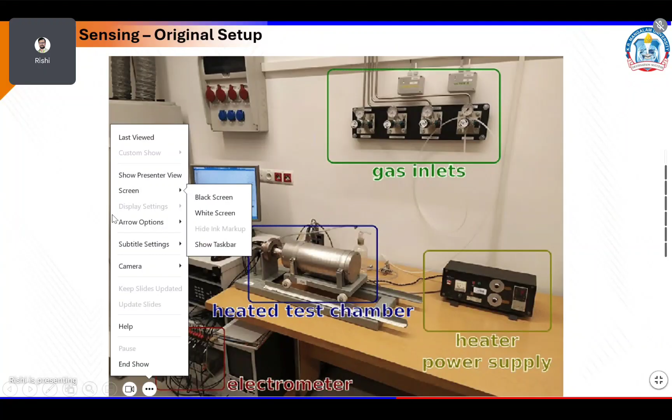Okay, so you can see this is the gas inlet system where the gas will go inside the chamber. This is a computer, and this is a gas sensing chamber where you will put your sample and the gases inside. And this is a heater power supply, and this is a gas cylinder, and this is the source measurement unit, and this is your complete room. So this is one of the images.

But now for the research community or other people, sometimes you don't want to disclose your original image. So what you will do is prepare a schematic.

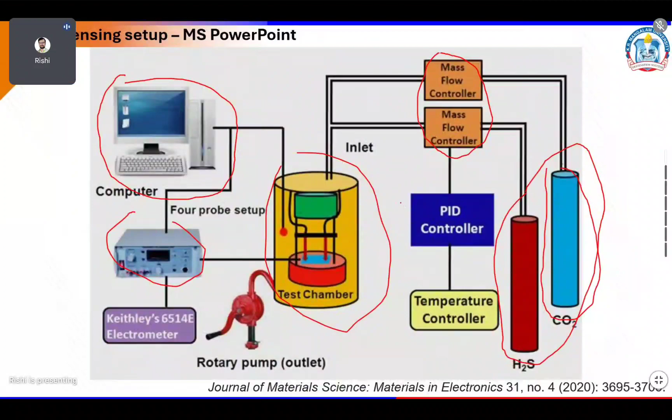Now, why do we need Blender? Because this is a very simple image, for this you don't need Blender. I also believe this image won't look that much beautiful, and it's very simple to draw in any software. Now comes Blender.

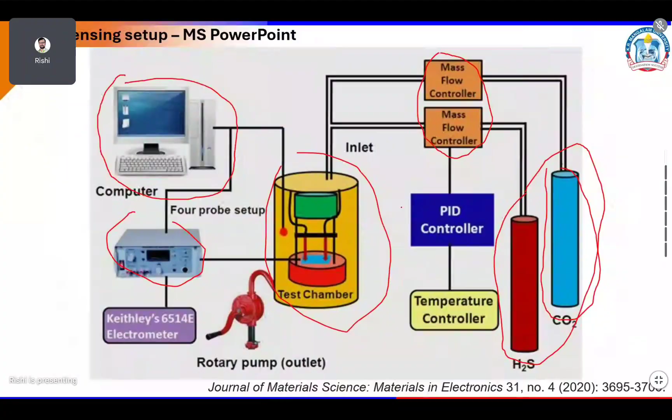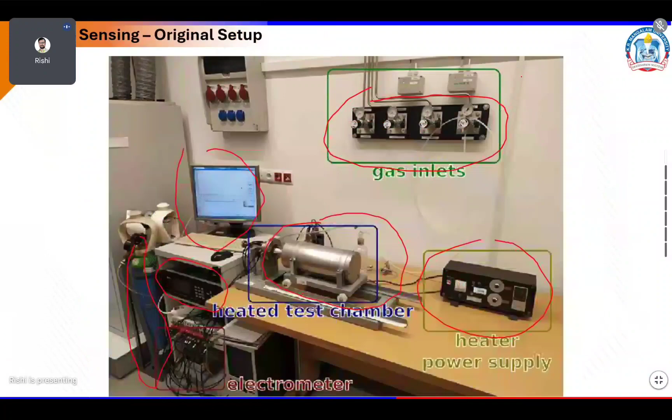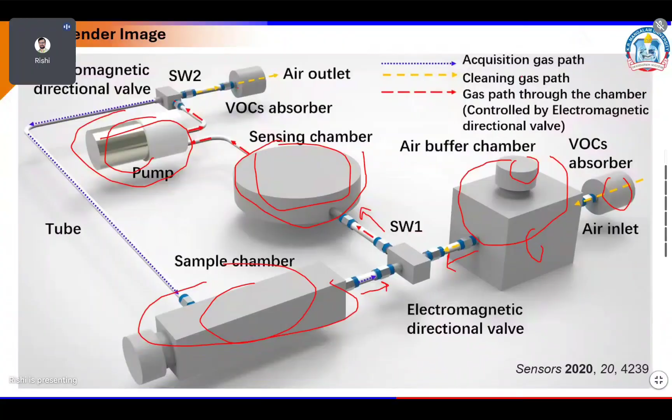It all depends upon your creativity and lots of time. You have to put actually lots of time into creating one image. This image you can see takes just maybe 5 to 10 minutes. This another half an hour. This will take roughly, once you get the experience, maybe 5 hours or less. But this image will take roughly maybe 3 or 4 days, once you get all the experience.

Now, with Blender software, you can draw figures, create cover art, and also create graphical abstracts. Figures, I think everyone knows what they are. Cover art is maybe, whenever you go to the journal page, for every volume they are releasing cover art. I will show you some examples of cover art also.

And then the graphical abstract—this is the first thing which all the reviewers and all the authors will see. So these all three things can be done from the Blender software.

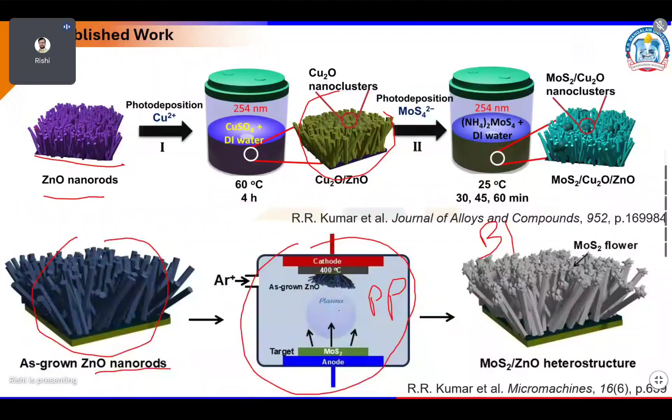Okay, so this is one of the two figures which I have used in my papers, and this is a figure in another paper. You can see this is a process which I used in the Blender software in my research. For Blender, I made this, I made this, I made this. I just changed the color of the top because there are certain processes happening, and then I have taken this sample inside this one. These things are happening inside the beaker, and after that these are the final structure, again drawn in Blender.

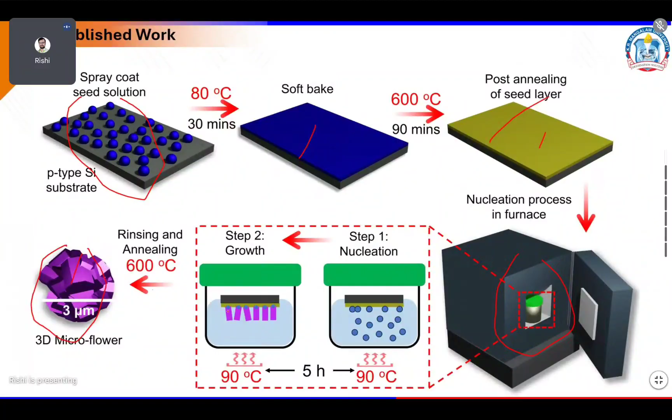But now these two images, you can see, are made in PowerPoint. It's just the front view, so it doesn't look like a very good image, but just to save my time and effort, I used PowerPoint to show the process which is happening while we are heating our sample inside the furnace.

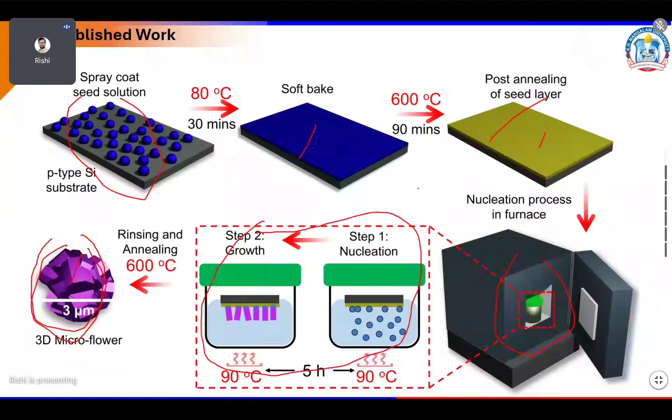So these are the process steps for creating the 3D microflower, the indium oxide 3D microflower. So this way also you can create 3D designs.

And now these are some of the other objects which I recently made in Blender software. This is another rod with some nanoparticles, and this is a thing which is present inside a gas sensor. These are like flowers on top of a substrate, this is a furnace, this is a watch, because I'm working on a wearable device, and this is a sphere with nanoparticles on top, and these are some molecules.

And this is another one, when you combine all the spheres and molecules. This is a chamber, a gas sensing chamber, and this is another device. Now in the center you can see one object is rotating.

So this flower is also made in Blender software. And the good thing about Blender, as I mentioned earlier in my presentation, is that you can export your 3D object to anything, like you can import this 3D object into PowerPoint also.

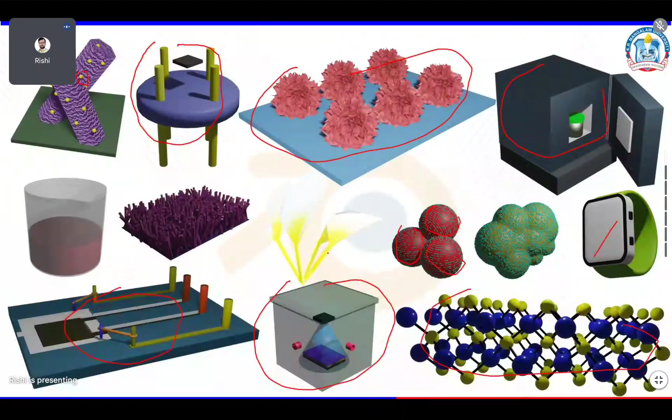I think in PowerPoint everyone knows that. So this is go to insert, then you have 3D models here. Just you need to click on 3D models, and these are some of the 3D models which are available online, free to use.

Okay, let's take one of the objects. So now, okay, flower. These can also be drawn in Blender, but I just want to show you this particular feature.

So you can see this is a 3D object, but it looks like a 2D object. Now if we rotate this object, you can see all the dimensions of this particular object. You can see the back side, the top side, the bottom side, the left, right - all the views you can see for the 3D object.

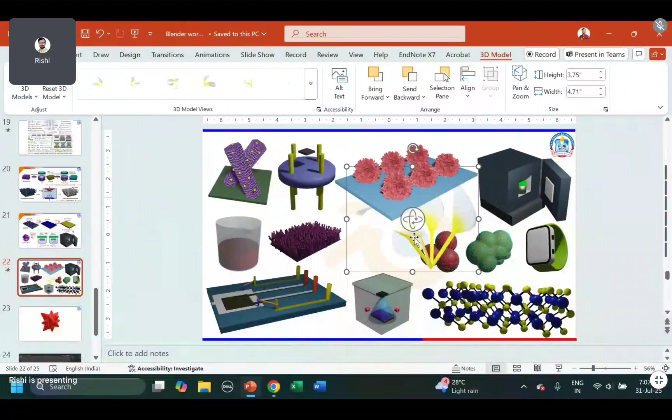Similarly for this case also, this flower. Since I imported this flower in 3D form, it can be rotated, it can be placed, it can be used as it is, whatever you made in Blender. But all these other figures are not imported in 3D, these are all 2D imports because I just wanted to make a figure. So this thing and this thing have different formats.

This is saved in just the JPG format, and you all know JPG format can only be downloaded in 2D form, not 3D form. You can see the 3D form, but it cannot be rotated. If I want to make this particular rotation, I have to export in 3D format, not image format. So this is the difference between exporting your file in 3D format versus just an image.

And for the animation, you don't need to do anything, just swing, that's it. So this is how I made this image to swing in my particular presentation.

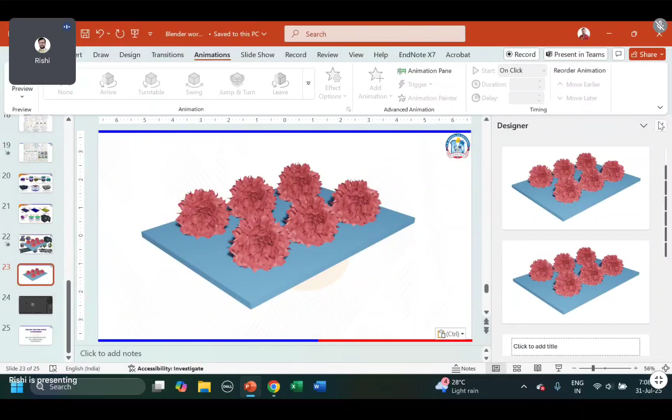Now, because these things will take a lot of time, today I'm only going to teach you how to make this particular image, since it's a very basic thing. I'm going to introduce the software also, and how to make this particular image.

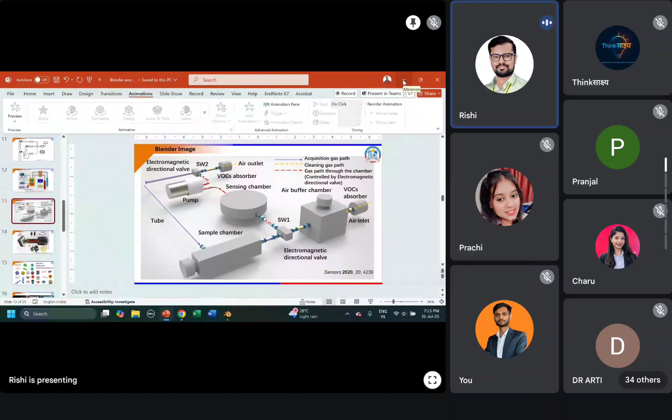So in my presentation you can see why we need the light. Let me show you why we need the light. So in this image I think you can see there is some shadow in almost all the objects. So from where the shadow comes? Whenever light falls on a certain object at some particular angle, it will form a shadow.

So very basic understanding, we require a light. If you don't put the light then the image will appear dark. Not that much dark, but still we require a light.

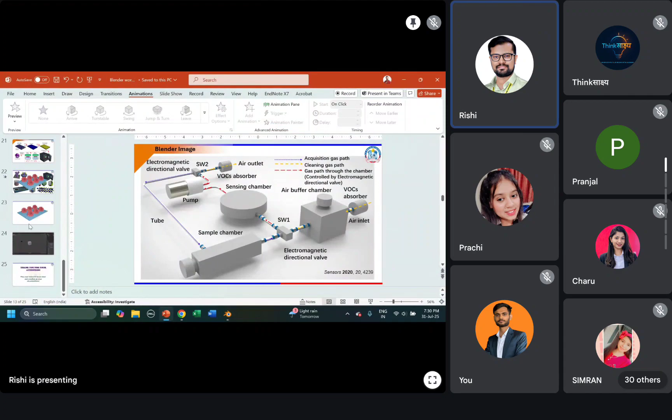So we did all the basic things - you can locate, grab the object and take it to any position, you can rotate the object in almost any direction, and you can scale the object in any direction. From my PowerPoint you can see now the base thing is very easy to make. I think by this you get to know how to make this.

You don't need to do anything, just scale the object, like this. Very thin, and make the rotation 0. Now this is your 0, and now go back to this, this is your first thing - this is what you are going to look like from the top. But we don't want to make our image like this, so we want a rectangle.

For this, what you have to do is scale in the Y direction, S Y - now it will be your substrate. Now left click and confirm the new position. Now you can see it is very thick, so what you have to do is just scale in the Z dimension, S Z. Now you can see we are able to make a rectangle - a cuboid, which looks like a substrate.

So this is a very basic thing which we did. Now this camera means - just imagine you have a DSLR or mobile camera. What you do is just place your DSLR in front of an object, and whatever image is there in front of the camera lens, that particular image will be captured, that particular area will be captured.

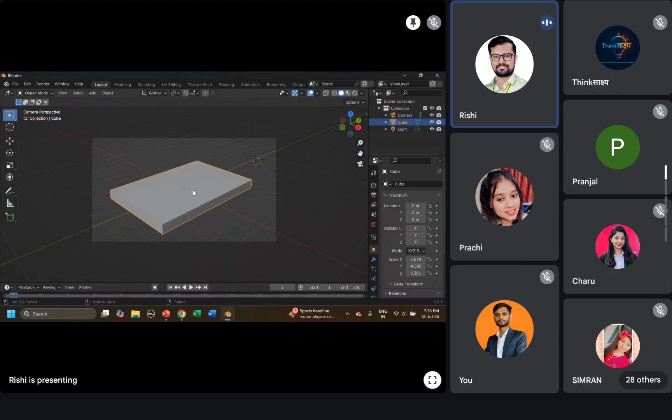So the substrate is done. Now let's hide this substrate, not delete it, because we may need it for future.

So if you see this image, the substrate is there, and these flowers are on top of the substrate. You can see all the flowers are of the same size and same structure, no change. So what you have to do is go by a logical way: create one flower and then duplicate it.

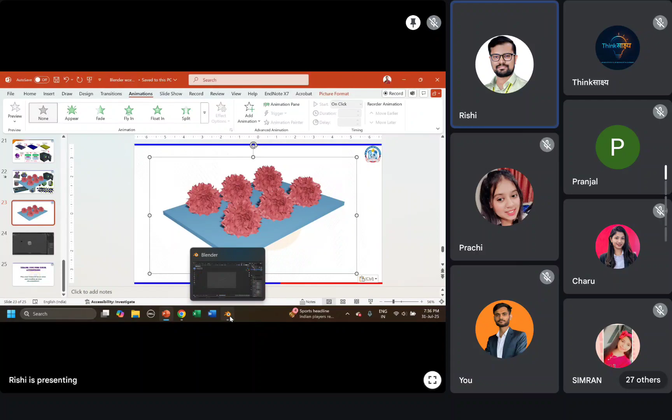So go back to the origin. You can see the cursor is somewhere away from the origin, so to take this 3D cursor back to the origin, click Shift S. This is the cursor menu, you can see selection to cursor, selection to active - all these are cursor options. You want your cursor at the world origin, so click on this. Now your cursor is here.

Again, you can now remove your camera, you don't need to do anything, just click anywhere on the screen away from the camera. This is your camera. Now you can see the camera is placed away from the center - previously the camera was somewhere there. Now go back to your origin.

If you want to add a new object at your origin, the shortcut key is Shift A. Shift A means add menu. You can see there are lots of things which you can add in your 3D viewport, so we are going to add a mesh, a plane. You can see it's a two-dimensional object - if you see it from one axis it's one-dimensional, if you change the view, then it's two-dimensional.

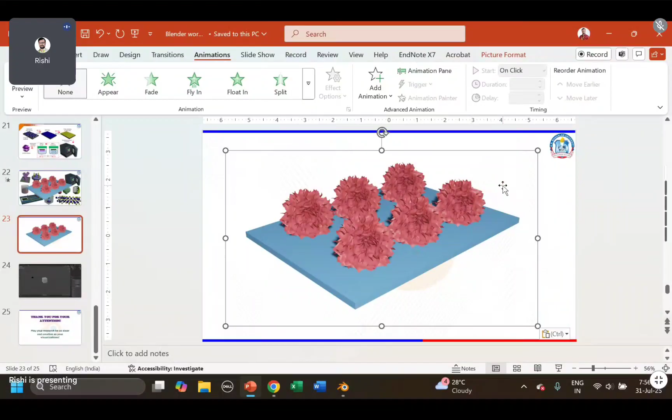Now this will be your image, which is going to be saved. But now you see the problem, the background is gray color. In my case the background is white color. Actually, not white, it's transparent. So a very small change you have to do in your system.

If you want your image to have a transparent background, go to the Properties panel, Render Properties, and scroll to the bottom. This is very important for all images. Go to Film, click on the render tab, then click Transparent.

That's it, done. Now if you go back to the render image, this will be your image. You can see it has now become transparent.

Go back and save, save as. Since it's an image, just give it some name and save the image. Now your image, this complete area, is saved.

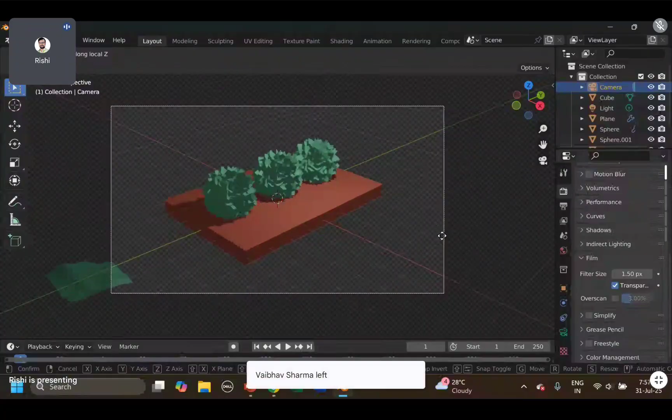You can reduce the area also by taking the camera, clicking G, Shift, and then middle mouse button. It's all up to you what you want to show, you can show like this also, it all depends on you.

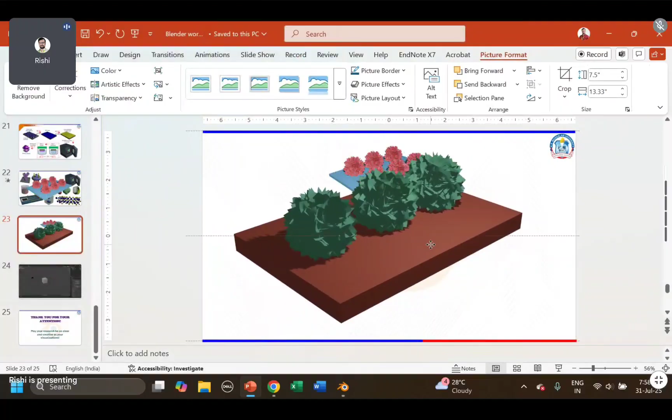Now go to your PowerPoint or any video, since it is saved in image form. Insert pictures, go to documents, find the file wherever you saved it. Now you can see it's all transparent background.

Since I have used 500 watts of light, it looks a little darker. Here I have used 1000 watts of light, so it appears brighter. So this is a very basic phenomenon, like this.

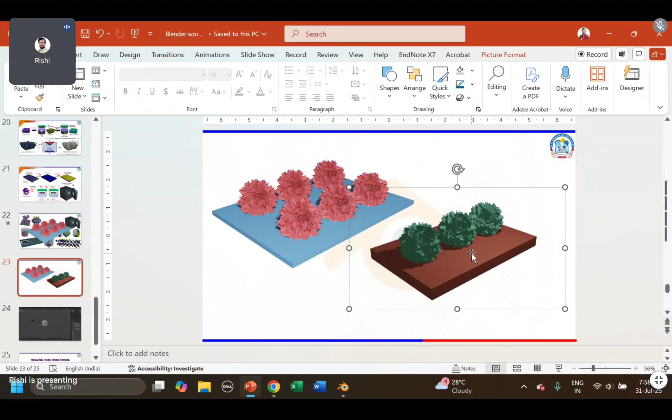So this is your image. You cannot do anything because it's a 2D image. It looks like a 3D, but the image file is 2D.

Now the final step, if you want to save this, you can give some name and add dot blend, and save the blender file. That's it, this is now done.

Let's make another object quickly. If you want to select one object, click Shift. If you want to select two objects, click Shift and select. Now two objects are selected and currently you are in this particular object. If you want to select this object also, click on it, so now three objects are selected using the Shift key.

If you want to select all objects, click A, and all objects will be selected, you can see all the objects. If you want to select these three, you can do like this also, so these four objects are selected. This is how you can select some objects.

Now let's delete everything. I deleted the light also. Shift, shift, delete, there is one sphere, delete.

Let's make a very simple cup. Shift A, mesh, for a cup we use the cylinder. Now you can see it is just a cylinder. So in a cup, what actually is there? There is a hollow thing inside a cylinder.

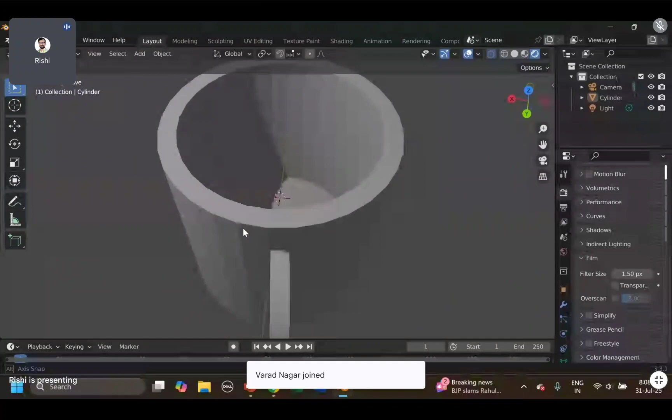Now you can see it appears like a... Now go back to object mode, now you can see the faces also for this. So nothing, just select this object, click on W, and then shade smooth. Now it appears like a cup. So that's it, now go back to camera. Now you can see the handle is not visible.

So what you have to do? Either rotate the object using R Z - if you do RZ, you can see the object rotating. Otherwise, rotating the camera will take you a lot of time.

Now this looks a little smaller. So click on the camera, Shift G, middle button, and that's it.

Now if you do the render image, you can see that the gray background is also available. Let me save this image without making the transparent background, just to show you the difference.

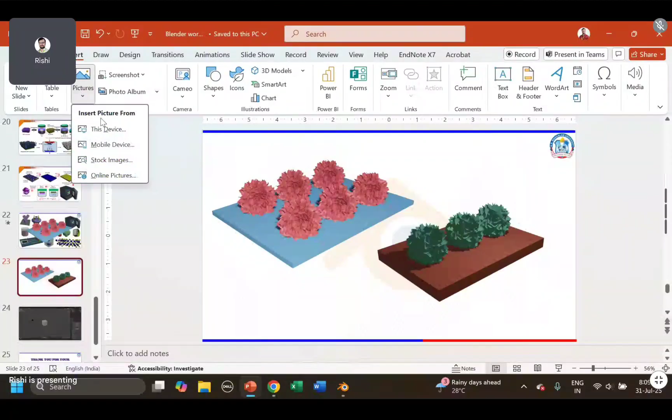Now this is the difference - you can see the gray background is also visible, but you don't want this gray background. So go back to the software, go to render properties, and click the transparent option.

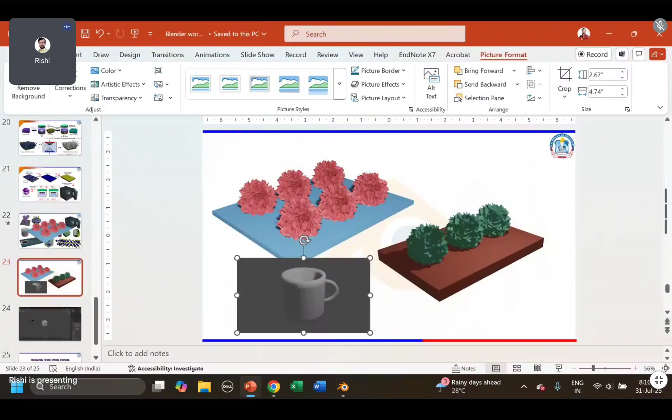Now this image will be saved as a transparent image. Save image, save, and then insert. Now I think you can clearly see the difference between the two images.

I think these are a few basic things and few basic shortcuts which I wanted to tell you. There are actually lots of other things - I only told you a few. Maybe in our next session, we will cover more advanced features and objects, and how to do more advanced work. I think that's it from my side.